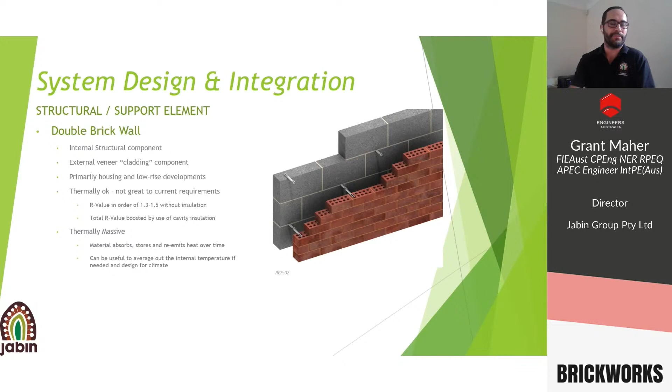A typical R value for an uninsulated double brick wall, you're looking in the order of R1.3 to 1.5. Obviously, introducing insulation, deeper cavities, things like that, you'll improve your overall performance. But generally, that's kind of a stock standard installed product.

Now, if we look into rainscreen cladding, brick veneers, we see these in housing a lot. Timber frame, insulated panel on the interior face, Gyprock cladding on the inside, painted. Then you have the brick veneer on the outside, which provides not only protection from the elements, but also a bit of a thermal break.

The thing with bricks is they are quite thermally massive. They hold heat, and they store heat. So you've got to make sure that you insulate the internal surface. Otherwise, during the cooler periods, you will get re-radiation of that heat back into the internal space. R value, again, not going to go into too much depth, but you're looking at R2 to R4, depending on thickness of insulation, what you're using as framing, cavity depths, things like that.

You can do brick veneers in high-rise. Here you'd probably utilize either structural steel, aluminium or light gauge steel framing, an insulative sarking build-up, and then that face brick look, which, spanning over multiple stories, you'd have to introduce movement joints and the like.

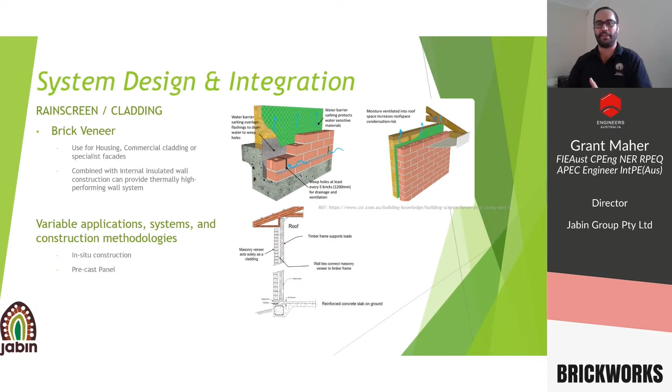There's also a variable application here, with two different methodologies. You have in situ, where you're actually laying the bricks by hand, or nowadays we're seeing you can also move to precast. So you're getting controlled environment fabrication of a brick wall set into a precast element, then brought to site and lifted into place. That gives you a lot of efficiencies from an installation perspective, but also gives you control, where you're not relying on labour working around people on site. You can have that control in a factory and then bring it to site and install it.

Then we move on to, what do you call it, maybe just a cladding or paneling system, similar to veneers, but this is where the introduction of, say, terracotta cladding would occur. You'd have a pre-constructed frame, potentially even a prefabricated panel, but not necessarily, and then you could bring it in and install it, similar to any other cladding system.

We have various types of these cladding types. As mentioned, prefabricated wall panels. There's examples now of what's called a panel brick, I think from Austral Bricks, where it gives you the appearance of a brick wall, but it's actually panelized almost like a precast element, brought to site, lifted into place. So again, you have that control.

Also, you have these brick-style clip-in cladding systems, which are almost like an individual cladding element onto a steel subframe, held in by clips. An example of this is the Corium product.

You have direct or standalone cladding. These are more on the terracotta side of things, and there's numerous examples. There's the Terracade product, the Moeding, which is German. Argeton, I think, is from Fairview, and then Faveton's another example, but there are others, and that gives you basically a terracotta panel, extruded terracotta, baked in various colors, that earthy color, supported by a subframe system, and then bracketed back to concrete, steel, whatever the primary structure may be.

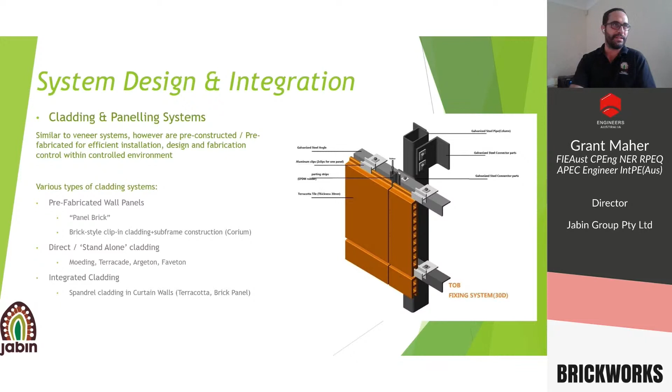And going outside of just cladding, bricks and terracotta especially can be used for specialist applications. You might be using them for solar shading, sun shading, also just an aesthetic look, not really providing any other components of the building other than the appearance of it, or even a barrier against impact or debris or the like. And I'll touch on three of these items in the project examples shortly.

So here we've got some projects. Obviously, this is a pretty famous one. Unfortunately, I didn't get to work on this project. When I was a contractor, we didn't win it, but I do know quite a few people who worked on this project. But it's a very interesting one where, even though it looks very complex, and it is, the methodology is still very similar to pre-existing ways of supporting brick.

Obviously, if you didn't notice, the Dr. Chau Chak Wing, which is the crumpled paper bag, as they call it. So here's an architectural mock-up of what they wanted the brick to look like. So we've got that curve, very smooth curves into quite sharp curves as well, with glazed window systems within it.

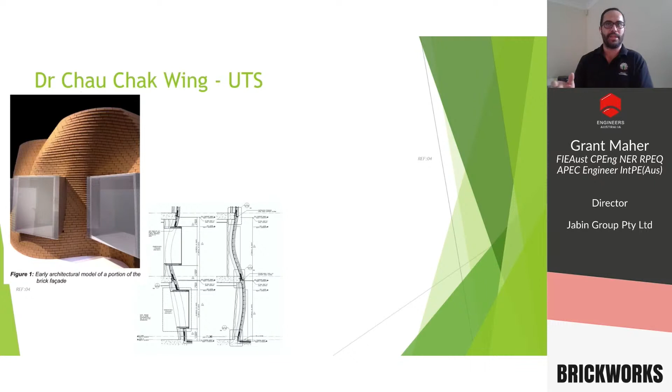So if you look at sections through the building, you see that basically the brick is held and supported by a structural steel frame, and then the bricks are panelized and supported by that frame. When I worked at AECOM, I was fortunate to have a chat with the people who designed and went through the whole process of doing this. There were just a few examples of the mock-ups and the process they did, but the basis of the support structure for the brick was brick and tie. So you still had the same concept of supporting your brick system with the ties.

They just obviously had to be developed and designed in a way to take the stresses of those huge big curves and what looks like cantilevers heading out, tying those bricks back into a solid steel structure that can be molded to the shape of what you need.

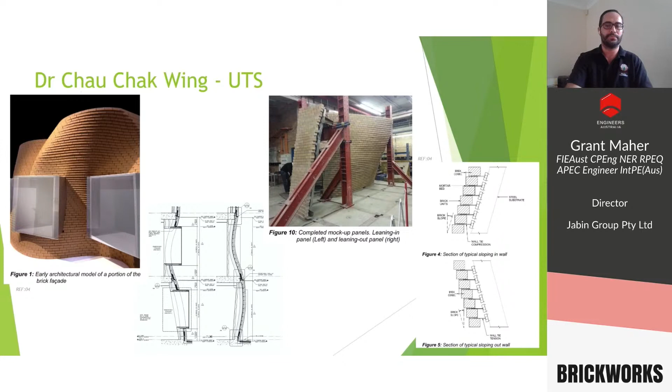The example of using terracotta cladding for a solar shading element. Here's the Advanced Engineering Building at the University of Queensland. I was fortunate enough to work on the concept of this building back in 2011 when I was at Aurecon. I actually worked on the timber structure, but colleagues of mine got to work on the external solar shading and how to come up with the details. It was Richard Kirk Architects and Hassell in combination doing the architecture.

And here we see that the terracotta is actually used as solar shading to the internal space. So it's not a structural element, but it gives you that visual look. It's almost like an old stone wall or something to that effect. And then the modulation of the terracotta.

So here was a concept of the structural support, how we support the terracotta panels. Basically it was a steel tube that was installed, done the same way, bracketed to structure. And then the terracotta was actually an extruded brick type of varying sizes. And inside you had a support element where you could rotate it and lock it into place to give you that different sizing.

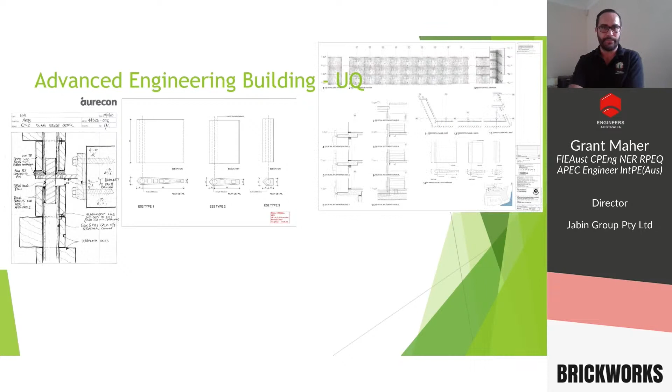Here are some examples of the actual cross section of those terracotta panels, the extruded sizes, and they gave you the variability of being able to modulate the facade basically any way the architect liked. It's just a quick rundown of some architectural drawings. And this is the system mock-up that was done to show how you could move it around, position it into place, and what it would look like once installed on the project.

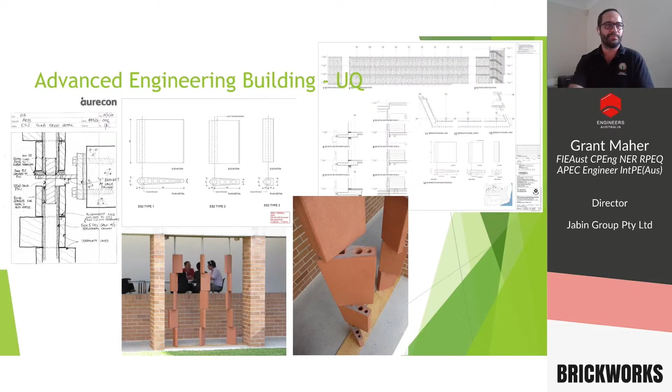So again, with the curtain wall systems, rather than having just a standard glass spandrel, the architect wanted to go for this visual look of a banded terracotta. I'll just go back, sorry. I think in general, about five or six different colors were used throughout the building, with different sized panels. And then you got the modulation across the facade.

So these were extruded terracotta. I believe these were molded, from memory. Each tile had four different variations of size. I think they ranged from about 100 mil up to 300 mil in width. Thickness was about 30 mil.

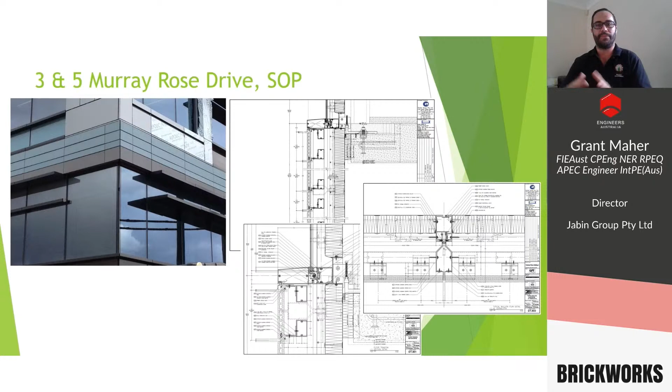And then finally, this was the mullion. So this is a horizontal section through the mullion of the curtain wall, where we had brackets coming out, extruded, all custom extrusions, all custom dies and everything. So this is all pre-done, pre-installed to the mullion, and then basically fitted together as we got to site in one big panel.

So the final project I'll talk about today is a current project that I've just finished designing, and it's in fabrication and will be getting installed on site soon. So this is the new Jackson on George bar precinct in the new George Street Plaza. Part of this project is a residential commercial high-rise, and then a plaza area which includes this, which is a new bar, retail and food and beverage.

So this is aluminium extruded framing for the roof. So these are all 11-meter high arches, aluminium extruded arches with a big hole cut in the ceiling. But the cladding that is put in there is all terracotta. So it's extruded terracotta baguettes, which is a circular shape with an internal sleeve for support. And because of the variability of how the architect wanted this to look, they're actually installed individually.

So these little snippets here are from a presentation that we gave. This just shows how these baguettes are actually installed onto the building. So on the structural aluminium section, which is the roof, it's holding nothing else but itself and the terracotta. So this is all bracketed on. So we have individual brackets for each baguette. Again, because of that variability, we had to do that because of the randomness that was desired.

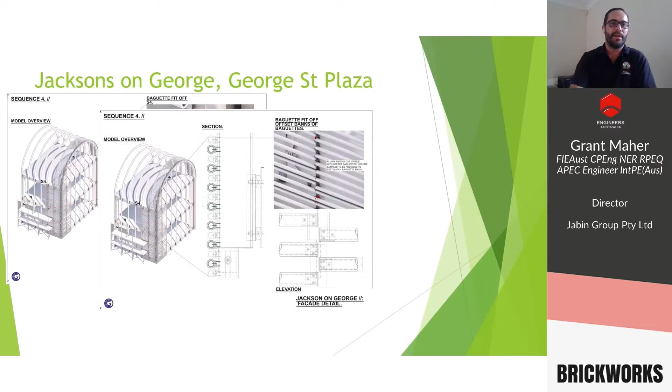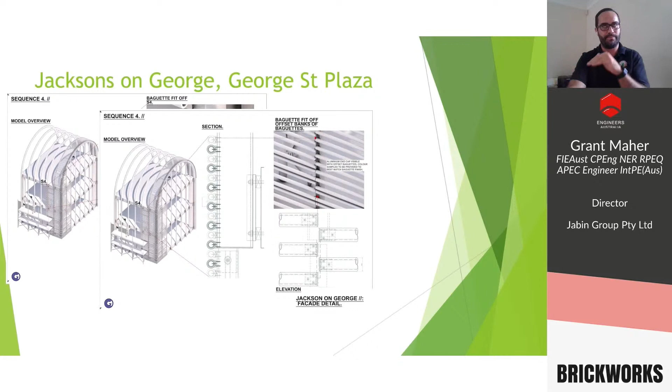And then as we go through, we install each bracket, and then each little supporting element. It's fixed off to the structure, and then it's panelized. Each baguette is then installed. And then that's the final visual look that you hopefully see when we're all done. And that was just an example of the aluminium extrusion, which basically sleeves inside the terracotta baguette.

So the terracotta component of the baguette itself is not mechanically fixed, so to speak, in any way to the structure. It's sleeved onto the aluminium, and that aluminium has two end caps, which keep the terracotta in place. And that end cap is then bracketed back to the structure via the extruded aluminium U-channels. And that is how it's all fixed off, and it's intended to be a concealed fix.

One thing on this project is, even though it's a feature, it is providing a little bit of shading, but the main design loads on this were a little bit of wind, obviously, but mainly impact loading. So we had to undertake both soft body and hard body testing, and that was for human impact, so someone running into this, because it is a bar precinct. Even though there are glass barriers to the inside of this, so you can't physically run into it, it still had to be shown that it could take a particular amount of soft body and hard body load.

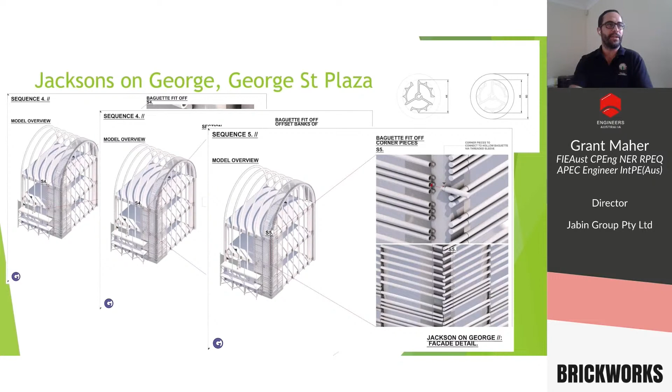So this is the test piece. This one, I'll just click it and see. This is the high density. So apologies for the delay, but basically the soft body is kind of like a big leather bag filled with glass balls or other kind of lead shot or something that affect a particular weight, and it's swung on a pendulum at a particular height to give you an energy. So here we see that because of the high density, it was able to take the high load and prevent, I think it barely even cracked when we tested it, and obviously no elements dislodged.

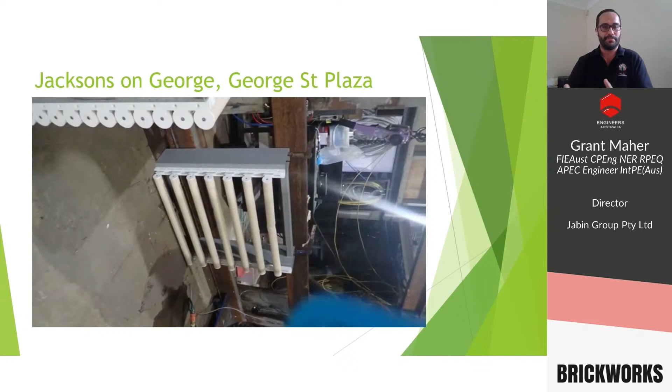So here we can see that it actually cracked and bent. Pieces of terracotta came off, but it didn't dislodge, it didn't completely fail, and it didn't fall off. So to the nth degree, yes, it partially failed structurally, but it passed the test because it didn't completely dislodge and fall off the building.

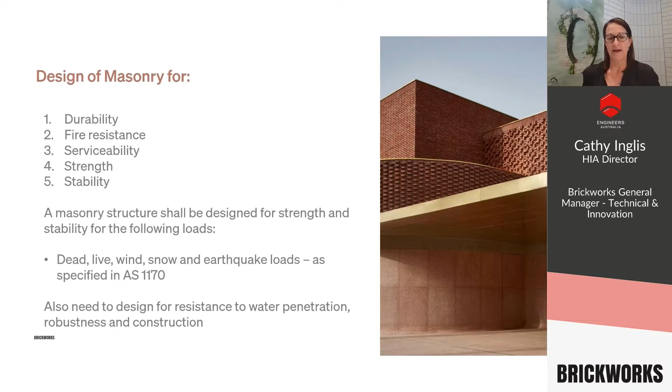Design for compression. When you get masonry units, the masonry suppliers supply you the f'uc, the characteristic unconfined compressive strength of the masonry. And the characteristic value is dependent on how many are tested to provide that value. The unconfined part of it depends on the height of the block, so it's all equaled out, so you can compare apples with apples and not dependent on the size of the product you're testing.

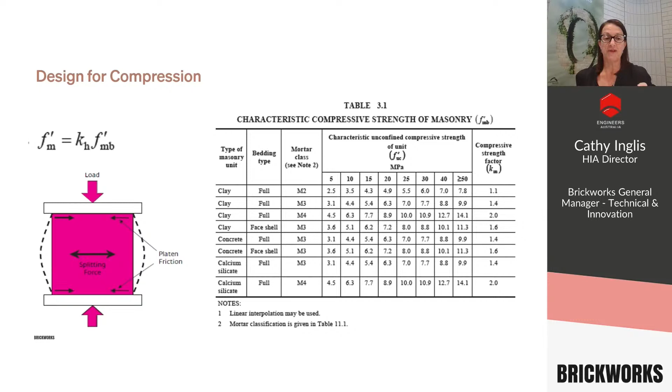AS 3700 then has a table which gives you the ability to calculate, depending on the type of unit you're using, whether it's clay, concrete or calcium silicate, what type of bedding, whether it's full or face shell, and what mortar you're using, to work out the strength of the masonry. So the strength of the masonry is determined from look-up numbers in this table based on the characteristic unconfined compressive strength of the unit and the mortar type, but also it takes into account kh, which is the relationship of the size of the brick to the size of the mortar.

So the joint thickness factor depends on, as I said, the height of the brick to the height of the mortar. So if you have a typically 76 high brick, which is the common one, that is a kh factor of 1. So the calculation in the table is by 1. But as your brick gets bigger, the factor increases so that you've got more brick in the wall. The brick is the stronger part of the wall, so you'll get a higher overall masonry strength the less mortar you have in. As you go to smaller bricks, you have more mortar in the wall, therefore your masonry strength will be reduced by a factor.

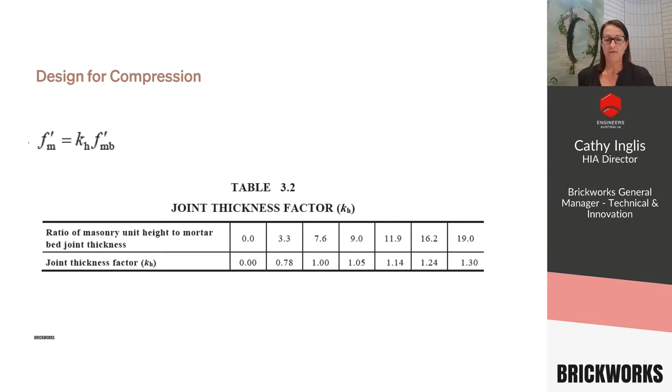If you're looking for extra design for compression in your projects, if you're doing high load bearing capacity as required, you can use special masonry. And this is when you use special masonry and test it using Appendix C in AS 3700. So you make the samples with the same materials, so the same bricks, the same construction methods, the same mortar that you're going to use on site, and you make these samples to a height to width ratio with piers between 2 and 5 bricks high. They shouldn't be less than 3 courses, and then once you test them, you can see one being tested there. You then use Appendix B to determine the characteristic value for the strength.

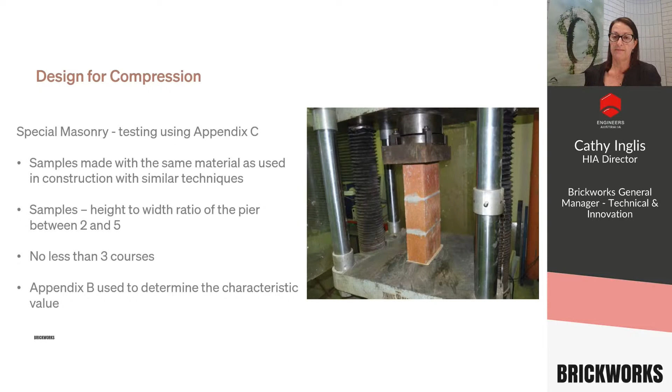The design for flexural strength is another thing that you can actually test to get a better value when you're trying to push your design for masonry. So the characteristic flexural strength value is taken to be a value of not greater than 0.2 for clay bricks. If you want to get higher than that, you can test using Appendix D of AS 3700, where you test stack bonded piers. And there's 2 ways you can test them. You can test them by using the flexural strength by bond wrench testing or the beam test method. And you can see both there on the right.

The schematic of the bond wrench test, this is where the top brick is wrenched away from the bottom, opening up the mortar joint and measuring the flexural strength of that mortar joint. Or you build a beam, as you can see below, with bricks joined end to end and mortared and applying a load across the beam. So either of those methods would work. The bond wrench test method could actually be done on site because there actually can be a handheld machine, or you make the prisms on site and send them off to a lab for testing.

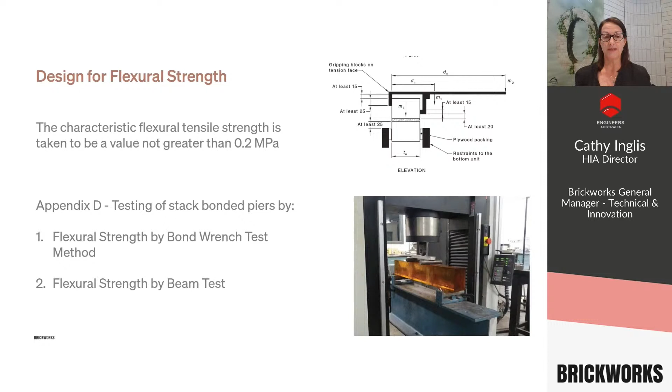So that's a way you can actually extend the capacity of your mortar by using special masonry, so testing on site, and that then is governed by your quality control on site, and the controls you have will govern how far you can push the design of your masonry.

The 2018 edition of the Masonry Code also included stack bonded masonry for the first time. So this was following a series of research done at the University of Newcastle, a lot of testing to determine the difference between stretcher bond masonry and stack bonded masonry. And the design rules that came out of this is that bed joint reinforcement needed to be included.

And this horizontal reinforcement needed to be included and must be continuous between lateral supports, spaced vertically at centres not exceeding 6 times the thickness of the leaf of the masonry. It must be within 300 mil above and below a horizontal line of lateral support, and also in the first bed joint above and below any unrestrained horizontal edge of masonry, such as a window. And this is all detailed in a little simple diagram in the standard.

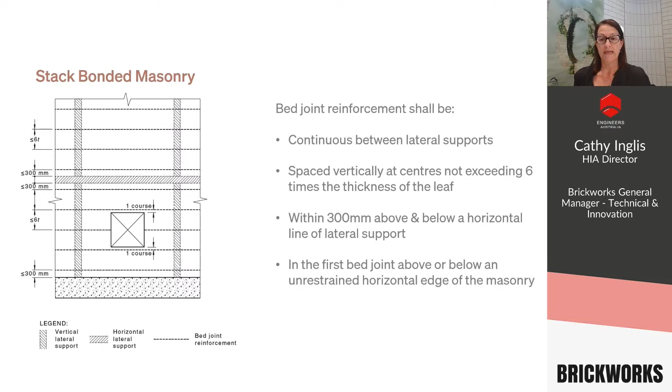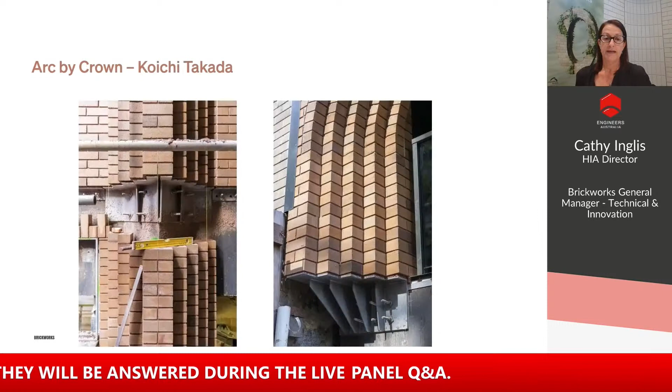So now we'll look at some project examples of masonry and, using those examples, how they can be built. So the Arc by Crown by Koichi Takada, this is built in Sydney, and it contains a series of arches built of brickwork to match in with the heritage context and the arches in the buildings nearby. So this building actually used no special shape bricks. It actually used all standard shapes. But at each slab level, there was a series of custom shelf angles used to support the brickwork, as you can see there.

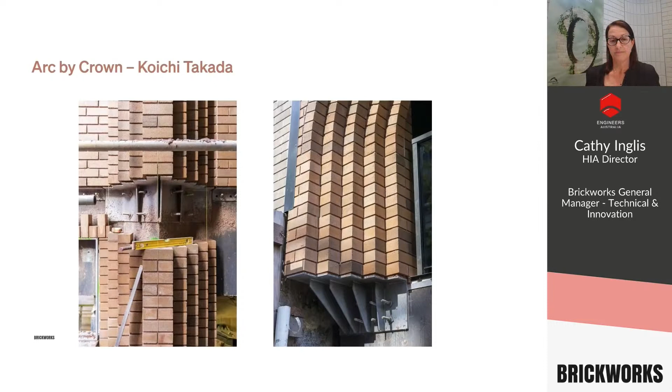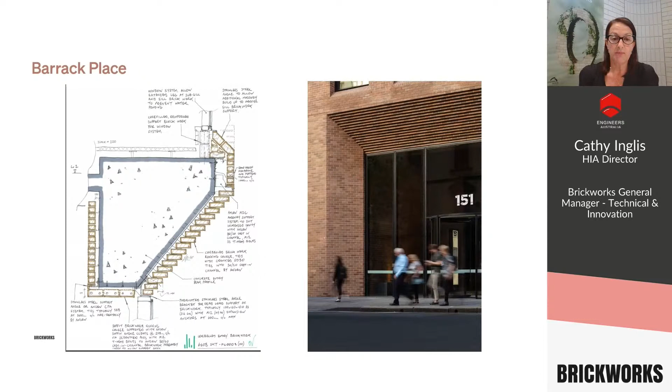At the base of this corbel, you can see there in a bit more detail, it's probably easier to see than the previous drawing. You can see that there was the brick suspended from the soffit, and this was done by using stirrups to suspend the soldier course that was attached there. So you didn't see any of the steel supports, you actually only saw the bricks.

And these custom angles that were developed and the stitching rods and the things were all done by Ancon, now called Leviat. We find that Ancon is really good. They have a whole series of standard ties and connectors for masonry, but they're also happy and willing to work on special projects to develop the necessary connections that are needed.

And on the left there, you can see the series of custom bricks that were developed. These bricks had the centre rebate, and that's based on the bricks that were used for the UTS Gehry project, the Frank Gehry project at UTS, which used a similar centre rebate and tie-back system.

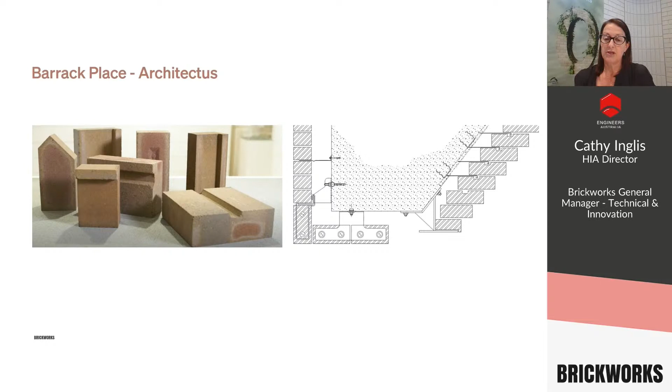The lowest brick on that shelf angle is an L-shaped brick, and that L shape wraps around the front of the steel support, so it hides it in the brickwork. It's a clever way to disguise the steel and just see the bricks.

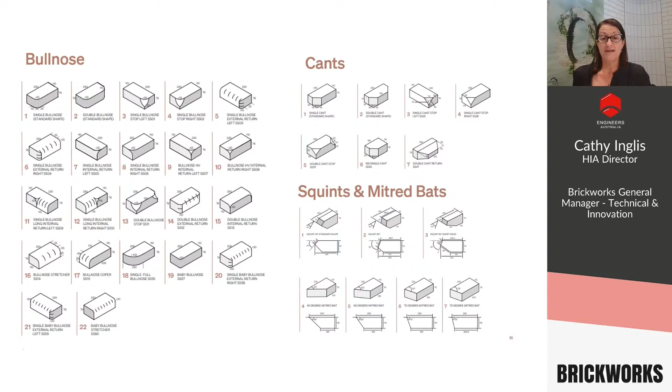So as far as bricks go, there's many, many shapes that are available. I'm not going to go through all these. I'm just going to show you the extent of what there is available in solid bricks. So there's bullnose bricks, cants, squints and mitred bats, plinths, radial and transition bricks, sculptured bricks, and then finally there's custom bricks.

So if this isn't one of the standard products that are available for what you need, there's a series of custom products that can be made. There are limitations on brickmaking, but we'll work with the architects and the engineers on their project to come up with something that can work, as we did on those projects that were just mentioned.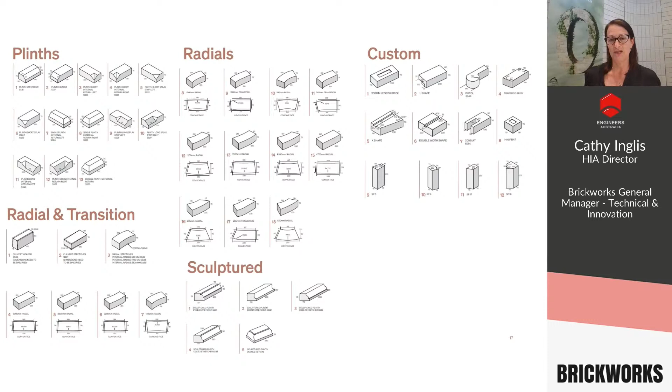So now I'm going to take a bit of a leap and look at a project that's over in Korea. This is the Celine headquarters built in Seoul, Korea. This project was built with bricks made by our partner in Italy, San Anselmo. So this project is the Celine flagship store, Seoul, South Korea. Architects were Casper Mueller Kneer from London and HAEAHN Architecture from Seoul. The manufacturer of the bricks was San Anselmo from Italy, and the client is Louis Vuitton Moët Hennessy.

So it's a 7-storey mixed-use building, and you can see there in the image it's got this beautiful veiled facade of brickwork with hit and miss, leaving out the bricks in certain spots.

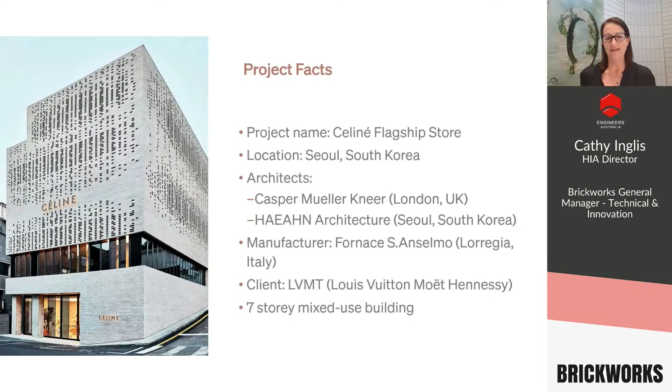So this was built under the Korean building code. I'm not going to go too much into that, but working with the engineers over there, the building height was 23 metres, the plan width was 13 metres, exposure B, an importance factor of 1, and its wind speed was 30 metres per second. So from that, we worked out the positive and negative loads required for this brick facade and what restraints would be necessary to support the masonry with that open, veiled structure.

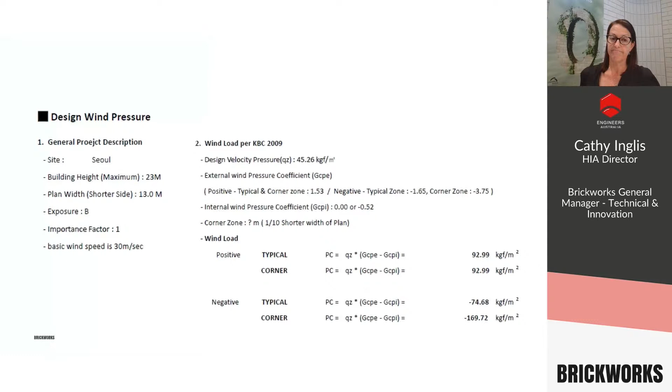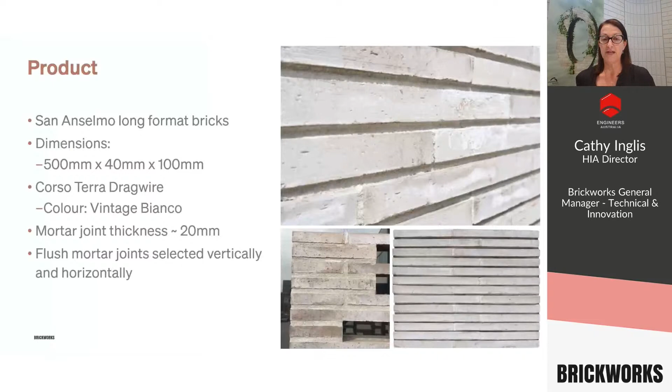So as I mentioned, the bricks were made at San Anselmo in Italy. The bricks were 500 long, 40 high and 100 mil deep. They're solid bricks. The brick itself is called a corso and it's got a wire drag on the face of it. The mortar joint was thicker than standard, at 20 mil thick, to really make it stand out. That also facilitated some of the supports that are needed in the building. And it had flush mortar joints vertically and horizontally.

These bricks are handmade in Italy, where the brickmaker actually forms slabs of clay and throws them into a wooden mould. It uses water and sand to create the shape, and then they use some wires to drag over the face to get that sort of rough textured finish. So the softness of this clay means it can't be an automated process, which is why they're handmade.

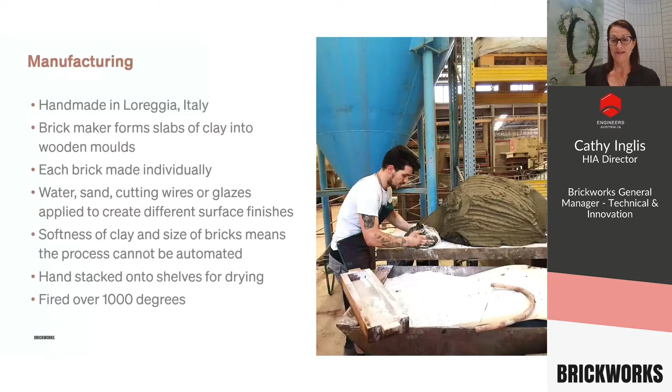They're hand stacked then onto drying shelves. They're air dried, and they're eventually put in the kiln and fired at 1,000 degrees, like most other clay bricks are. So as I mentioned, the bond itself is a very open bond design. So this was a retrofitted facade that was supported 420 mil from the existing load-bearing wall.

So for the design considerations, there were local seismic regulations that required an L-shaped shelf angle to anchor the brickwork at each story back to the existing load-bearing wall. The steel rods were used vertically to connect the bricks, and these steel rods couldn't be seen through the bricks. They had to design it so you'd never see a steel rod. So that obviously needed a lot of careful analysis and a structural study done.

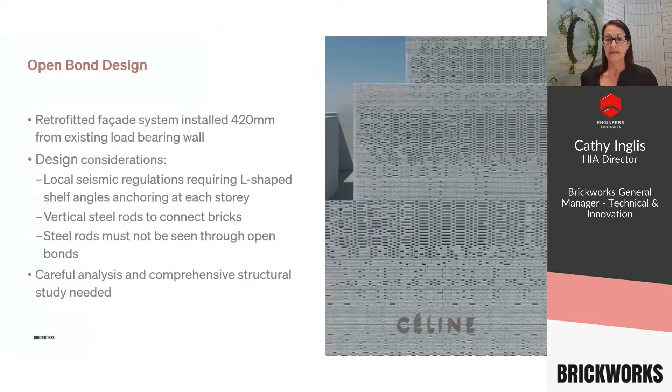So for the brick production itself, there were 3 different lengths of bricks made and required to create this shape: a 500 mil, a 360 and a 220 long. There were 13 different brick types by the time it got finished with all the core holes that were necessary. And these bricks had a different combination. Some had 4 holes, some had 3 and some had 2.

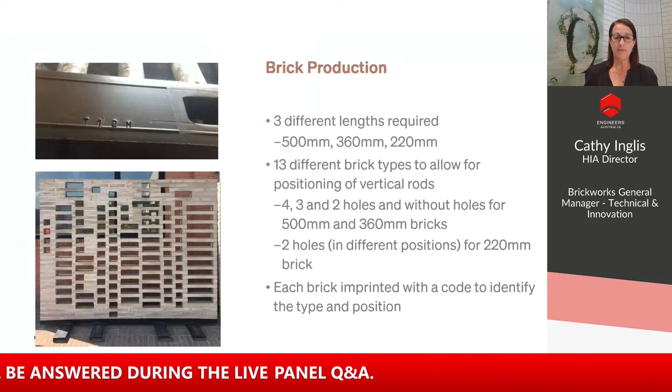And these holes were positioned so that they could incorporate the steel rods without ever being seen, depending where the steel rods were. But each brick was imprinted with a code to identify its type and position. And you can see that on the top. That's in the mould box. You can see it engraved on the brick there.

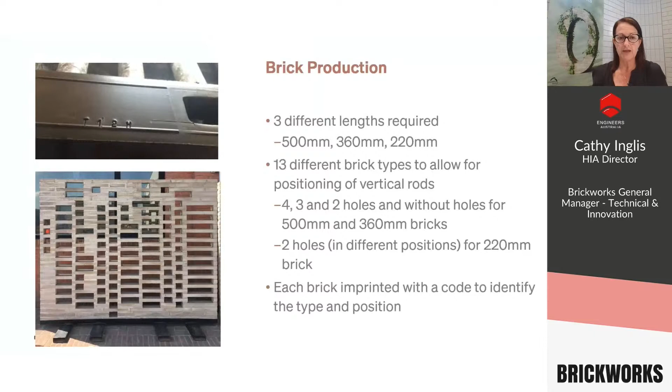So each special piece was colour-coded to indicate its position in the facade. So the magenta, the teal and the lime green. So the magentas are the 500 mil long bricks, and they were made with 3 different core positions. There was a brick with 2 holes, one with 3 and one with 4. Then we've got the teal brick, which is the shorter one, the 360, had 2 and 3 holes, and then the smaller one only had the 2 holes.

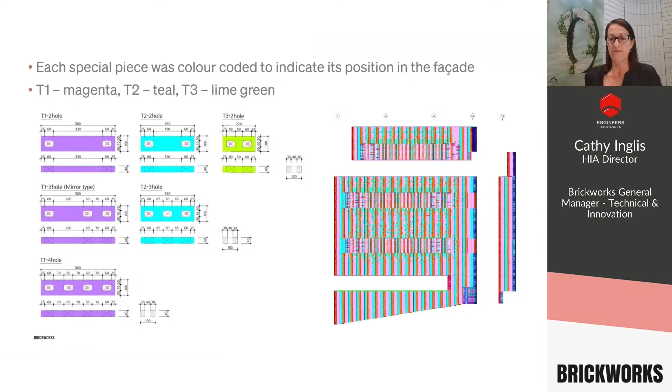And as you can see there on the right, the whole facade was colour-coded so that they knew the exact position of every brick to be used. So you can see there a bit more detail about the different colours and the position of the bricks where they would sit. In addition to that, there was a special hanging detail.

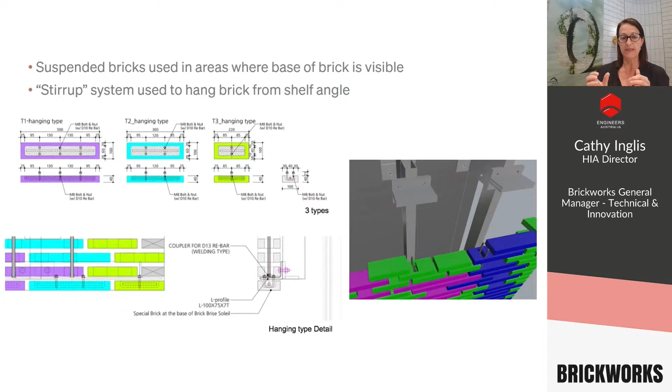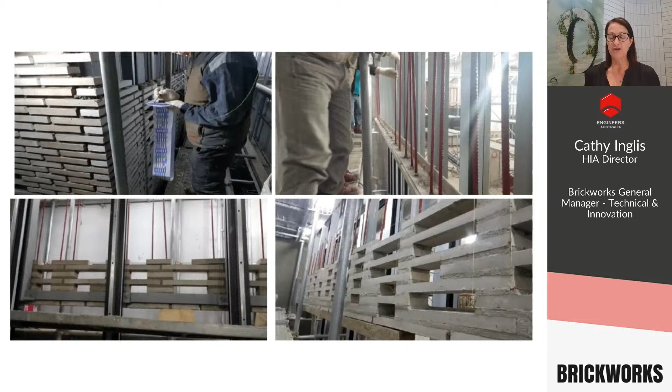So at the bottom, you didn't see the shelf angles exposed. So there was a handmade special brick that sat on the stirrup system at the bottom to completely encase and protect the steel. So just looking at the facade itself, the veil and the amount of opening in the facade changes as you go up it. That's the one facade, and the other side obviously has a lot more openness at the top and the bottom. So it's a very unusual design, and it was a very intricate job for the bricklayers.

So here you can see some of the brickwork as it's starting to go up. And you can see on the top left, the guy's got his pattern with the colours, and he's actually placing the bricks as per the design. You can see the rods that are welded to the shelf angle, and these rods were actually only ever maximum 1.2 metres long, to enable the threading of the bricks over the rods. You can imagine you couldn't do it floor to floor because it'd be too far to climb up, get the brick up and then drop it down the rod.

So just having a look at other steel, some of the really special, intricate designs of masonry really depend on the connectors, the ties, the reinforcement that's used to support it. Without going to really thick walls, masonry can only support so much under its own self-weight and self-compression. So when you get to these intricate designs, the use of reinforcing rods becomes very apparent and facilitates the designs.

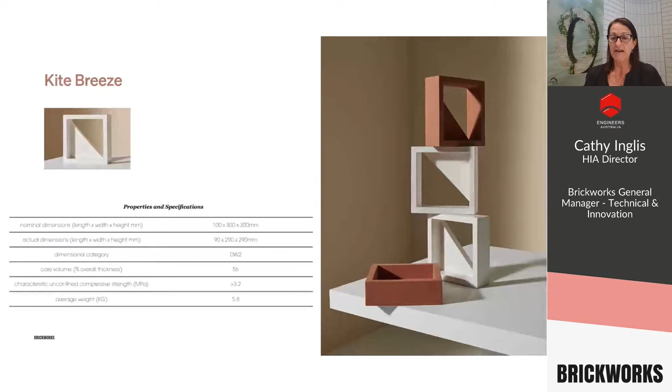So these terracotta breeze blocks are in the Brickworks range. They're 290 by 290 by only 90 mil wide. So a very narrow block. And that narrowness actually really limits its capacity for the product. There's no real design constraints for this in the masonry code. We actually had to do a lot of testing to work out what the failure path would be.

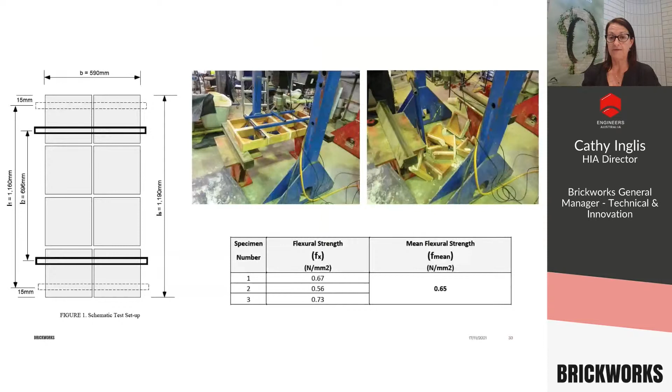Because they want to be stack bonded, the pattern itself doesn't lend itself to be stretcher bond laid. So we did a series of flexural strength tests. You can see there the schematic of it, and then also the testing that occurred up at Newcastle University. We built them 4 blocks high, 2 blocks wide, and applied the load and measured our mean flexural strength. This is similar to the beam test I talked about before, slightly different because it's 2 blocks wide, but we ended up with a mean flexural strength of 0.65, so a bit more than what's allowed in the masonry code.

So looking at these products itself, it's interesting. Architects really want big, huge walls, but they're very limited for their capacity because of the narrowness of the unit. They're very slender. So there I just show the difference between the block laid in stretcher bond versus stack bond. In stretcher bond, you can't build huge walls, but looking at a 0.5 kPa load, which would be your internal wind load, at 3 metres high, you can build a wall that's nearly 5 metres long.

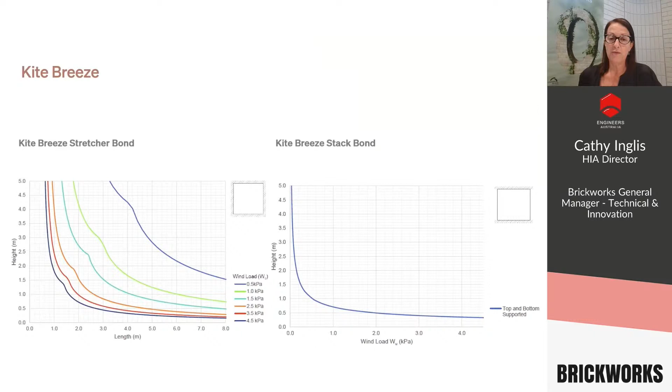But if you look at it stack bonded, you can see how the capacity is reduced by moving away from the stretcher bond, which gives you a much better capacity of the wall. So stack bonded, it obviously limits its application greatly. So we worked out, using reinforcement again, how we can make bigger walls. If you use stack bonded breeze blocks and put a 1 block wide column at each edge, a 90 mil block that's got 2 N10 bars in it, reinforced, you then have a greater capacity and can build slightly bigger panels.

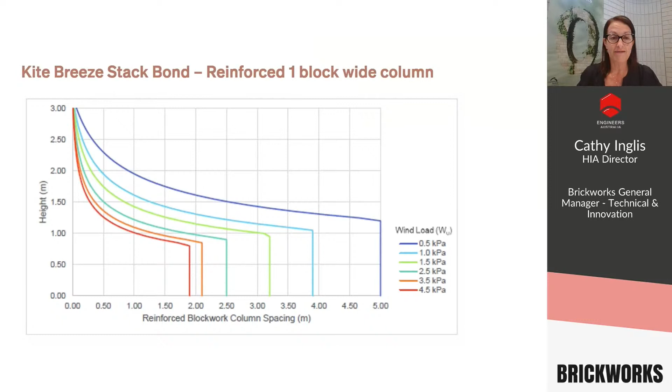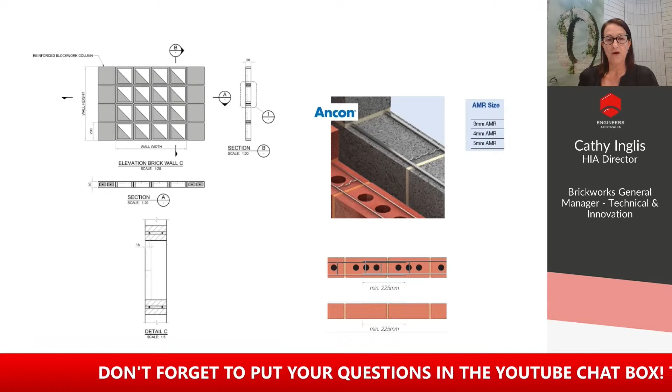If you look at that though, it's still not great. At 0.5 kPa, you can only go just over 1 metre high at 5 metres long, or if it's only 1 metre wide, you can go 2 metres high. So they're not very big panels. So that's where the steel reinforcement comes in, using horizontal bed reinforcement. You can see there, with the one column either side, what the design would look like with the horizontal bed reinforcement as well.

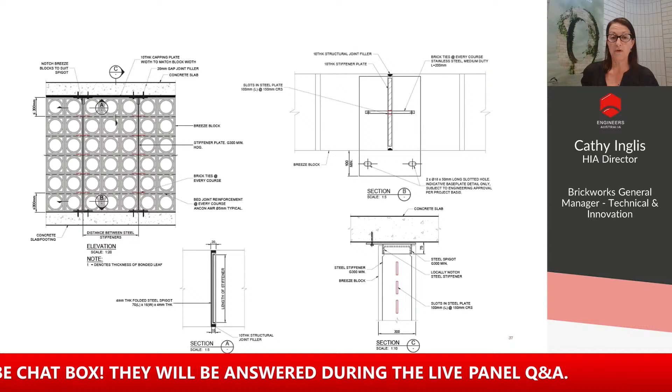But instead of using a reinforced column, if you use steel columns supported top and bottom in combination with the horizontal bed reinforcement, that gives you much greater capacity for the wall. If you look at the graphs there, the one on the left is for stack bonded single skin with a steel plate stiffener. With the steel plate stiffeners, you can get to a panel that at 5 metres long can be up to 2 metres high. So the steel obviously gives you greater capacity, which you all know.

And then we also looked at these blocks because they get great shadowing potentially. You can lay them different ways. If you do a double skin with the steel plate stiffener, you obviously get extra capacity because you've increased the wall depth, and you can see that.

So it's going back to the masonry code and how we calculate things. This was just an example to say that we took what was in the masonry code, which was very limited designs. So we tested the flexural strength for stack bonding to work out our design charts, and then incorporated the use of reinforcement in the beds combined with vertical reinforcement bars to increase the capacity of the design and use of these products.

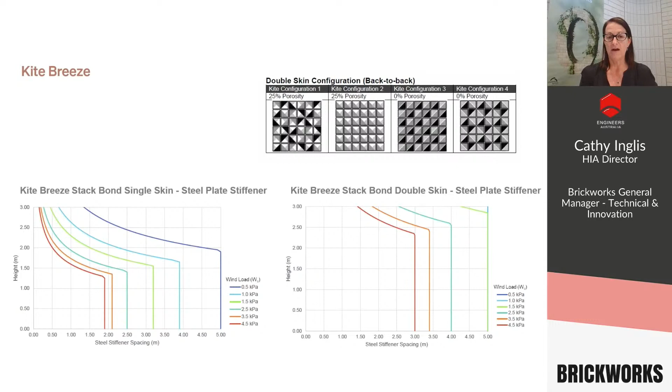There's also detailing and construction manuals, and manuals that give you the ability to calculate your spacing of control joints based on the E factor of the particular bricks you're going to use, so you can determine it rather than just working on the typical, standard 8 to 10 metres before you go to a control joint. You can work it out depending what bricks you have. So these manuals are really useful.